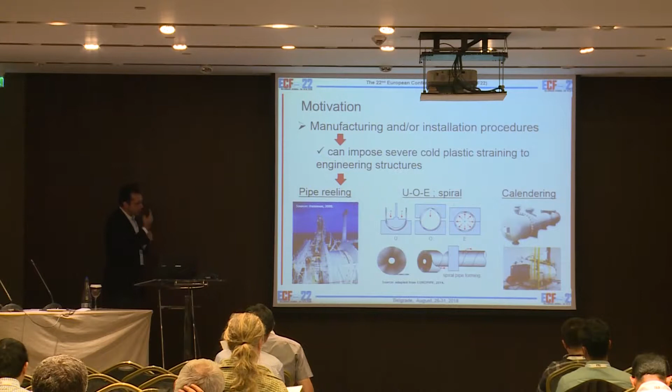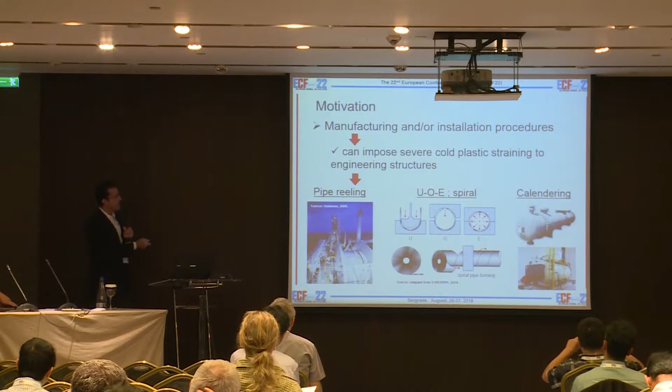As we all know, several cold forming processes can induce plastic strain into structures. In this work, we are talking about the UOE technique for manufacturing pipes and some pressure vessels, and the calendering process used for other pressure vessel applications. These were the two methods we needed to understand better. The main issue was that this kind of structure presents a non-axisymmetric plastic strain and residual stress distribution resulting from thermomechanical processing.

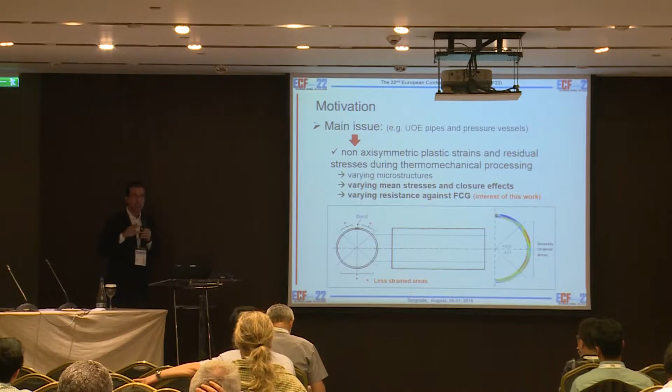Microstructures are thus varying, and we have varying mean stresses and closure effects, and thus the behavior in terms of fatigue crack growth. Here we are studying the fatigue crack growth behavior just to illustrate. The dimensions are not of the real components, but they are illustrative dimensions to show you what happened.

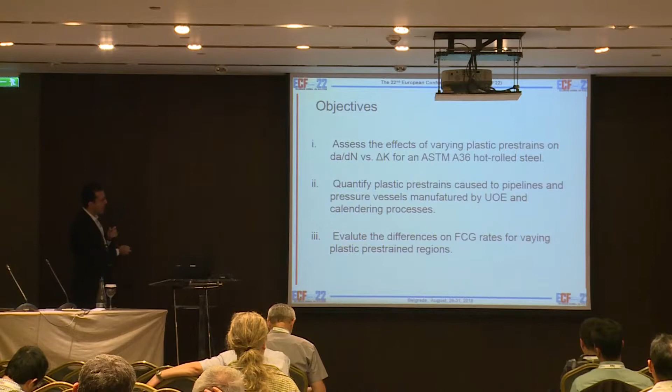The objectives include assessing the effects on an ASTM A36 hot rolled steel, which was used in one of the applications. The others employed API 5L steels, grades X65, X70, and X80. Second, to quantify plastic prestrains caused by the processing methods, and evaluate the differences in fatigue crack growth rates for different regions in the components.

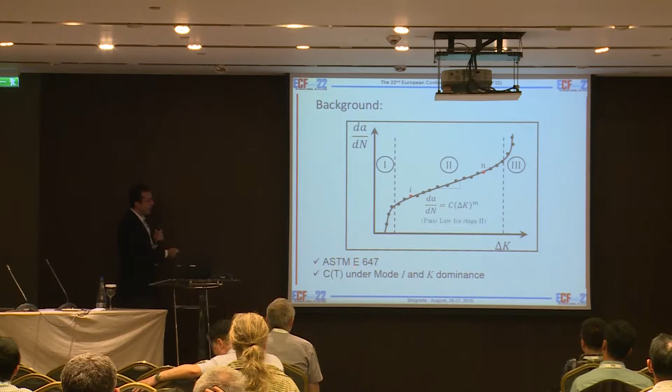So we used as a reference a Paris law and conventional fatigue crack growth testing under ASTM E647, under mode 1 and K dominance. This result is already published in the literature by Netto et al. 2007, showing the effects of increasing plastic prestrain on fatigue crack growth. The literature says that if you increase plastic prestrain, you reduce the da/dN in terms of crack growth rate. So in thesis, it would be better to have more plastic prestrain, if under control, than having zero or opposite strain.

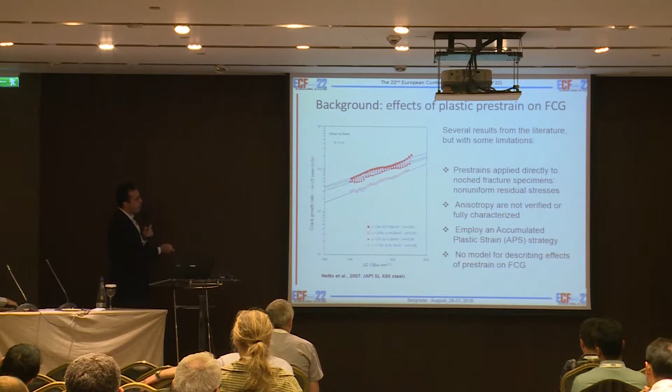This is just an example, but these studies have several limitations. Most papers apply the prestrain directly to CT specimens, so the stress distributions are not uniform - you have non-uniform residual stresses at every position the fatigue crack will progress through. Anisotropy is not considered. They use the concept of accumulated plastic strain - it's not wrong, but we didn't want to use it. And they use no model to describe the fatigue crack growth effects in terms of the material response.

So we developed a different technique. We developed some strips, and first of all, pre-strained the strips to have a uniform strain field. Parallel to that, we also pre-strained CT specimens ready to test, so we had the two conditions. Here I'm presenting the results of the pre-strained strips.

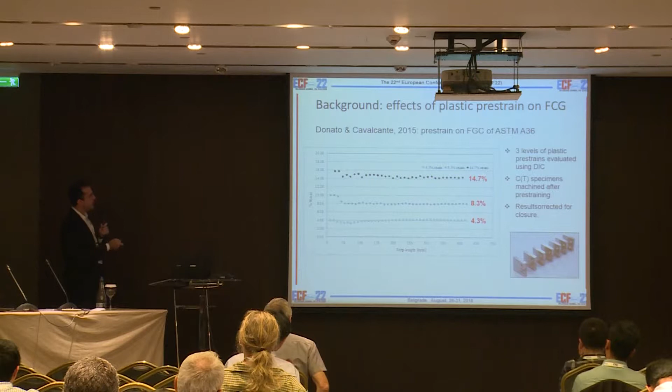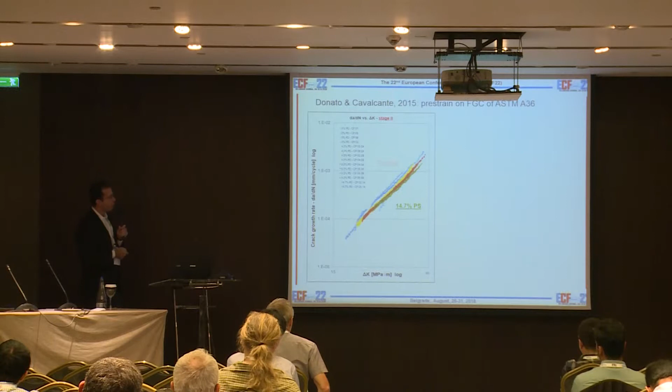So 3 levels, and the results were corrected for closure. Here you can see some of the da/dN versus delta K evolutions. The original is here, the 14.7% pre-strain is here, and using Paris law we could characterize the effects of the plasticity pre-strain level on da/dN, and calibrate C and M values using a best fit for a model presented here - one equation for C, one equation for M - and these are the best fits for all the conditions I'm presenting here.

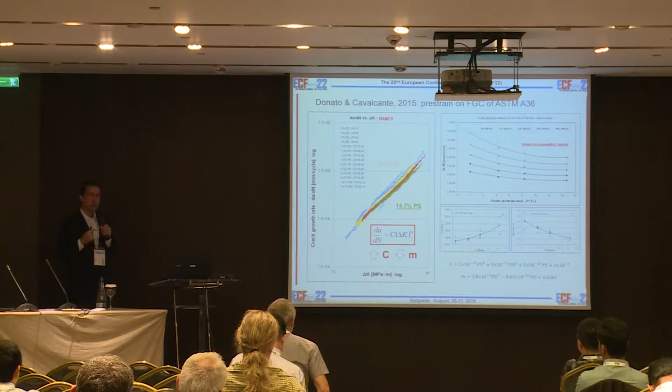The scatter is a little bit relevant, but I'm not discussing this point here. For the API materials, we developed a set of tests with more samples, so we had a very limited scatter.

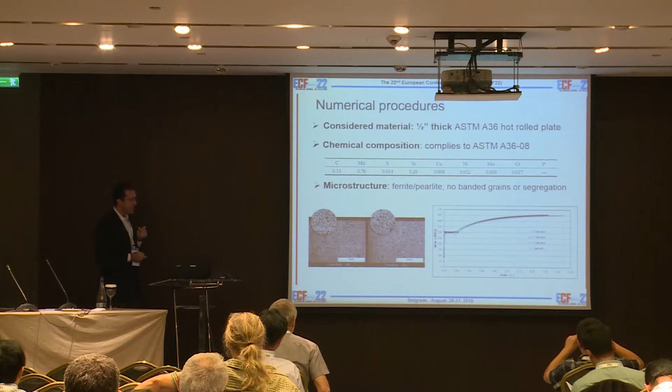The material is a half-inch thick ASTM A36. Here is the engineering stress strain curve. Here is the microstructure - ferrite pearlite, no banded grains or segregation in these plates. Here is just an example of both models.

I won't go into details because you can find them in our paper, but we used the dynamic explicit finite element method, plane strain four-node elements, the CPE4R - probably most of you know this element. The models are symmetric. We employed 5 elements through the thickness because we detected that with more elements the strain field did not change anymore, so to save computational resources we did it. The thickness in this case was 24 millimeters.

Here is an example of the UOE process. The tools are considered rigid.

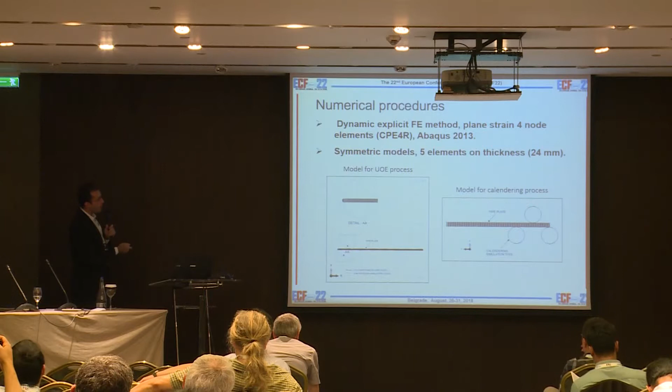We simulate this case frictionless, and we consider the contact formulation as discrete. Here's the model for the calendaring process. The numerical procedures that followed were the following.

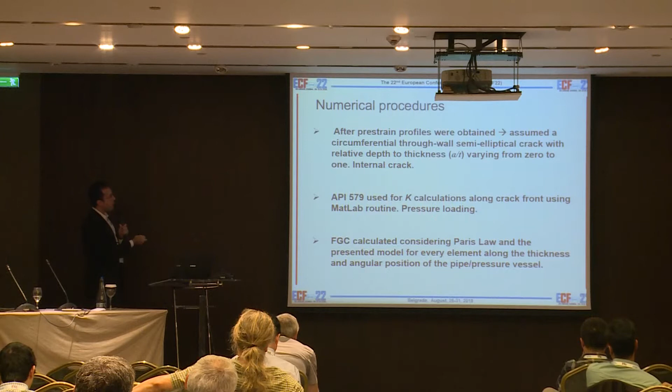After we simulated and got the pre-strain profiles, we assumed a circumferential through-wall semi-elliptical internal crack, with relative depth A/T ranging from 0 to 1. The crack started inside and grew until it reached the outside of the pipe. API 579 was used for the K calculations, and a MATLAB routine calculated K along the crack front. A fluctuating pressure loading was considered.

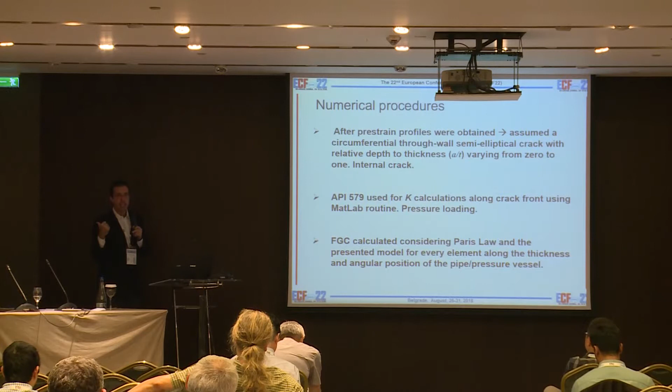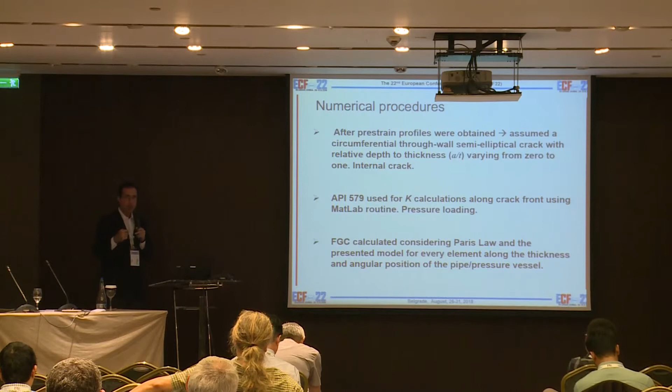The fatigue crack growth was computed using the model I showed you for the A36. We included the C and M solutions in the fatigue crack growth algorithm, and every time the crack grew, it calculated the dA/dN at that moment.

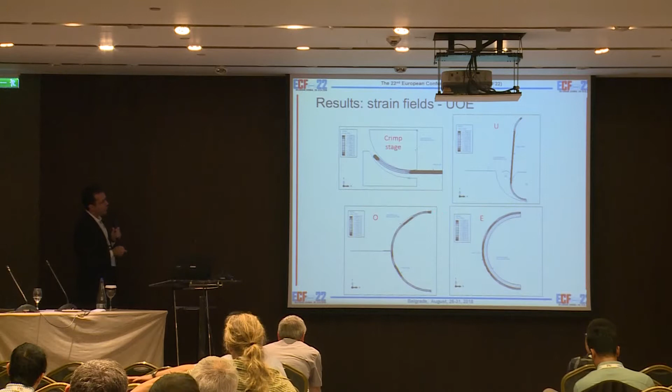Just for illustration purposes, these are some examples. First for UOE: the crimping stage, then the U forming, the O forming, and the expansion, the E forming. Then we could get all the strain profiles. Here we have some examples of the calendaring process, beginning and then all the process happening.

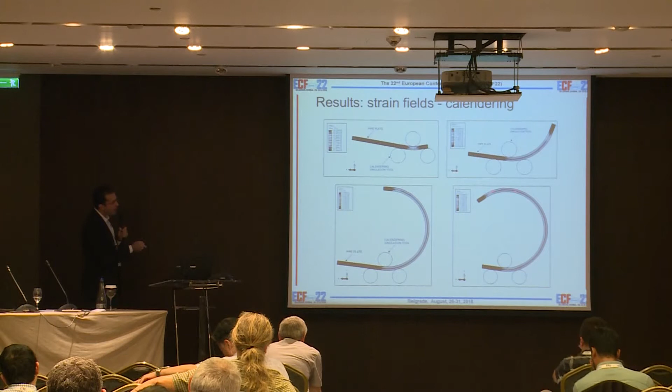In terms of the prestrain distribution, I want to call attention to something important here: these simulations for the ASTM A36 were not meant to precisely describe the strain field, so it's not so smooth.

For the API 5L applications, we used more steps and a more refined mesh to obtain the plastic strain fields for both UOE and calendering. I recommend this be done for every application you need. Here the trends are the same, but the graphs are not as smooth as they could be.

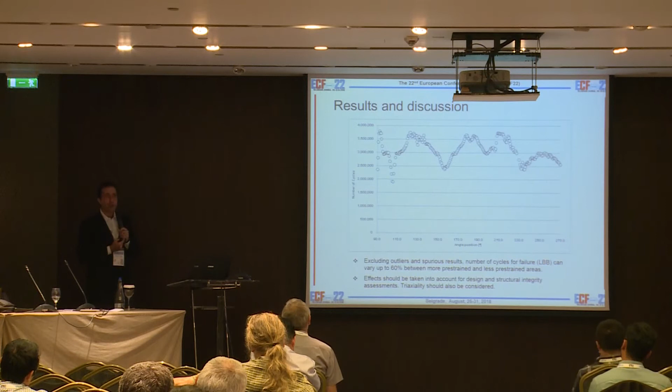I have one extra suggestion. We did not show the inclusion of triaxiality in the fatigue crack growth calculation here, but I suggest it also be included, because we have another investigation running in our lab in which stress triaxiality plays a relevant, remarkable role.

So it's a suggestion. Concluding remarks: we could assess fatigue crack growth for the ASTM A36. We had a significant reduction in crack growth rates ranging from 14 to 33% if we consider 4.3 to 14.7% of plastic prestrain.

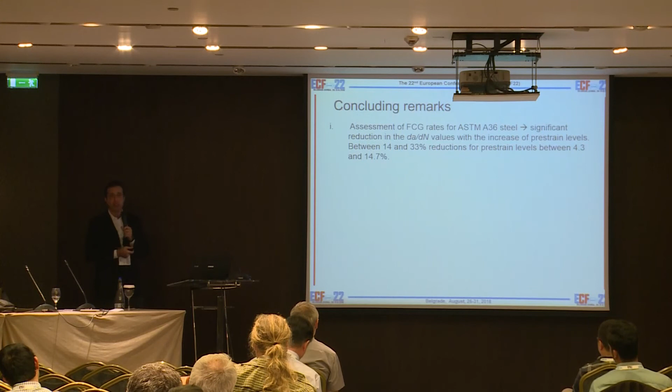The effects are non-linear with varying delta K; the greater delta K is, the more pronounced the effect of plastic prestrain. In our case, since it was a pipe with relevant thickness, triaxiality was already included, but if you have applications with varying triaxiality, take care.

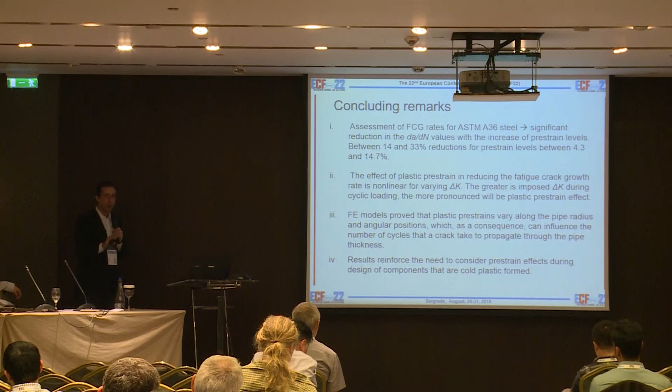The FE models proved that the plastic prestrains vary with radial and angular positions, and the results presented here reinforce the need to consider prestrain effects during design of components that are plastic formed. If you can also consider constraint, it's a good idea, and in real applications, just to give you an idea, we had deviations around 20% to 25%. So it's kind of relevant stuff.